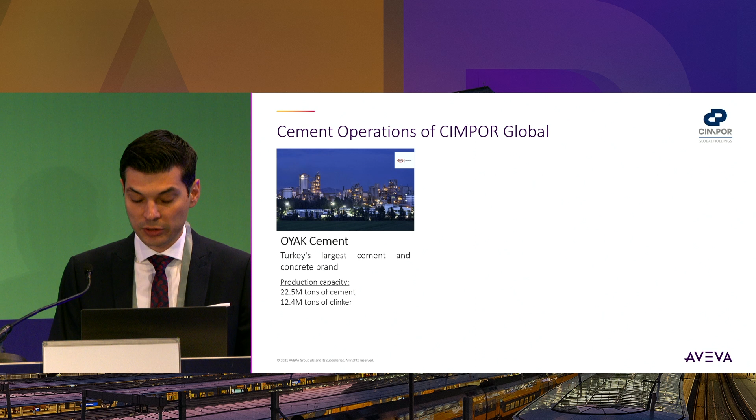OYAK Cement has a market share of 15% in total production and is the largest brand in cement and concrete in Turkey. CIMPOR Portugal and Cape Verde is the market leader with 55% market share in Portugal, and it's a well-known brand in West Europe. And the newest one is in West Africa.

It's CIMPOR Côte d'Ivoire. It's a unique plant. We are saying that it's a game-changing plant in the cement and concrete industry because it's the world's first greenfield calcined clay integrated plant. Calcined clay is a new artificial additive product, replacing clinker. The issue is that it has very low CO2 emission compared to clinker. We will produce low CO2 footprint products with that technology. Our aim is to spread it, especially to Europe and all over the world. That was the first plant.

When I come to our digitalization journey, it started nearly 5 years ago. The main aim was first to collect the data and to visualize it. But the challenge was online visualization of the plants, operational units in 3 continents at the same time. That was the first challenge.

The other thing is we wanted to try to do predictions and improve our efficiency, productivity, and quality on cement. Due to that, in-process predictions was one of the challenges. High reliability and predictive, prescriptive maintenance, and also emissions and the sustainability part, were our aims at the beginning, to collect that data and improve our abilities on those issues.

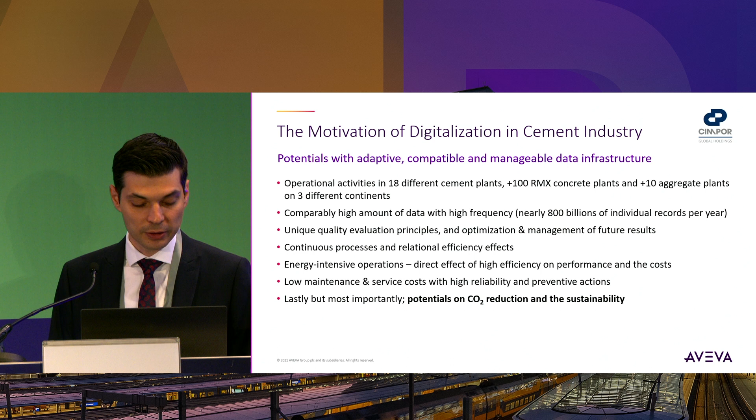Those are broad topics, but today the most important one is the potential for CO2 reduction and sustainability.

What are the challenges? We have a huge amount of well-organized and globally connected monitoring structure. It's not so easy - we did it with PI. We standardized the hierarchical information for all plants and implemented and replicated it, which sped things up so much. After designing the whole plant structure, we put it into the plant and connect all the signals from different sources, different brand names, different types and versions of PLCs, software, or other connecting units.

We could do it easily. Those connections and our data sources vary. Time stamping is critical because we try to make predictions and AI adaptations - time stamping is one of the most important parts. We could do it very well with PI, especially on the quality side.

Sampling was a problem. We solved it with QR codes and NFC-type readers connected to the PI system. Previously, samples were taken manually from the field to the lab, and you didn't know exactly which hour or date. Now we've connected that - people use handheld tools while taking samples, and we time-stamp the quality data. Quality prediction accuracy is mainly based on that issue.

It was critical, along with dynamic editing options. We are not losing our data - that was the biggest problem at the beginning. SCADA systems only store a certain amount of data, overwriting it after 4 to 6 month periods. Now, in some plants, we have more than 3 years of data available for all signals from that plant, and nearly 80-85% is on a second-by-second basis. It's very frequent, but we stored all the data to do that analysis.

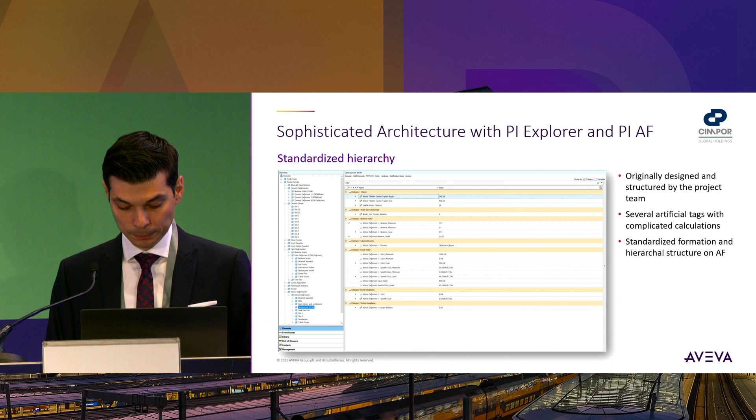That was the advantage for us. Just to show you some main screens from that, it's just our main structure. We developed and drilled down, as I said, from global main key parameters to plant and each unit's detailed parameter.

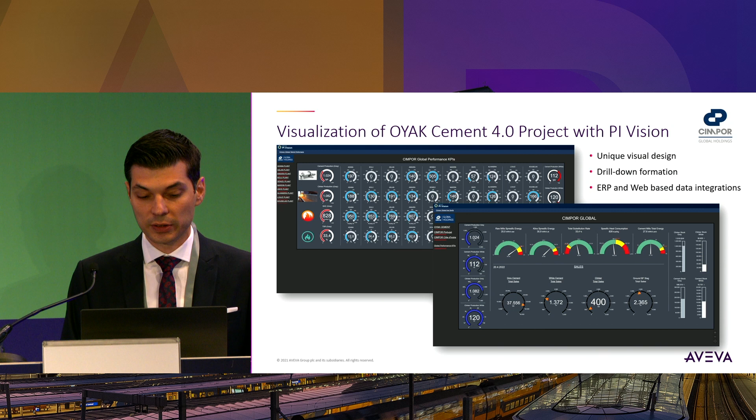We could see actually from anywhere in the world, with mobile phones too, by the help of that mobile capability. Now each plant's people can use it, and at the meantime design their own screens for unit-based or any equipment, whatever the aim - process, quality or maintenance part. Plant people are using those details in their plants.

Now I want to say why CO2 and cement industry matter. As we all know, after industrialization sped up all the issues, not only in the industry but the world's annual CO2 emissions drastically increased. It's the popular issue these days - to prevent it, to decrease it, to mitigate CO2 emissions.

The role of the cement industry is a little bit critical. The product is very cheap, but when we look at CO2 emissions per ton of cement produced, around 650 kgs of CO2 is discharged to atmosphere.

And when we look at how much cement is produced in a year - 4.4 billion tons of production in 2021 - it's a huge amount. When you multiply it, cement becomes - there are hundreds of different industries, but 7% of total discharge emissions is the responsibility of cement.

Anything we do can directly affect CO2 emissions. Due to that reason, it's our responsibility.

On the other side, with the taxing issues, especially in Europe and now coming everywhere, it's a cost for us. These days, cement price is around 80-90 euros per ton, and today's CO2 emission price has reached more than 80 euros.

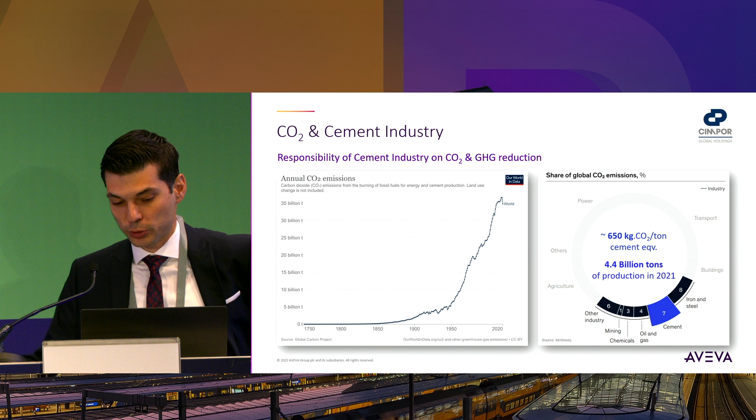What are we doing? What's the role of PI in our decarbonization strategies? The first thing is online monitoring and analyzing capability. Just the details, I will show you some examples - I'm passing that part quickly.

The other one is predicting emissions, guiding process control, higher combustion efficiency and less fossil fuel usage, high efficiency on grinding process and predicted fineness to decrease our electricity consumption, especially on the indirect part. Reducing our CO2 footprint with improved quality.

As I said, we are focusing on low CO2 footprint products like calcined clay, also using alternative fuels rather than fossil fuels, like SRF, biomass fuels from municipal solid waste. We are decreasing our fossil fuel usage, incinerating waste and using that heat rather than fossil fuels, decreasing our CO2 emissions, and improving productivity and efficiency on renewable energy systems.

It also helps us because we are focusing on renewable energy systems like waste heat recovery with turbines, using our waste heat to generate electricity, and we have solar plants. We need to follow them. We are planning to establish new wind turbines, and due to that reason we are also trying on that side.

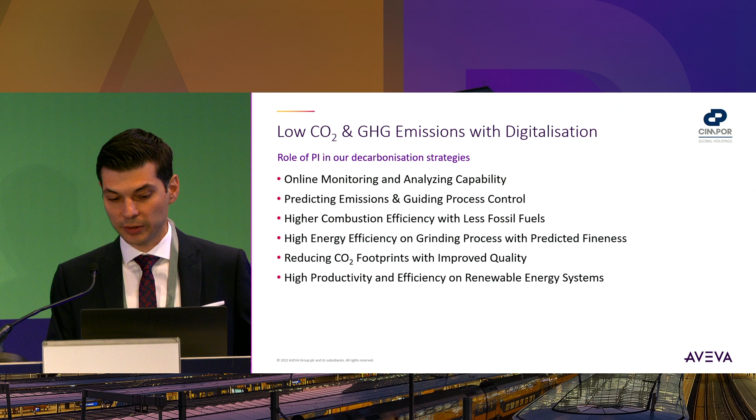On the follow-up issue while tracking emissions, here are some screens covering all Turkey operations and plants, and the main emission parameters you can see here - we could follow it instantly, like NOx, CO2, dust and SO2 and other parameters in PI.

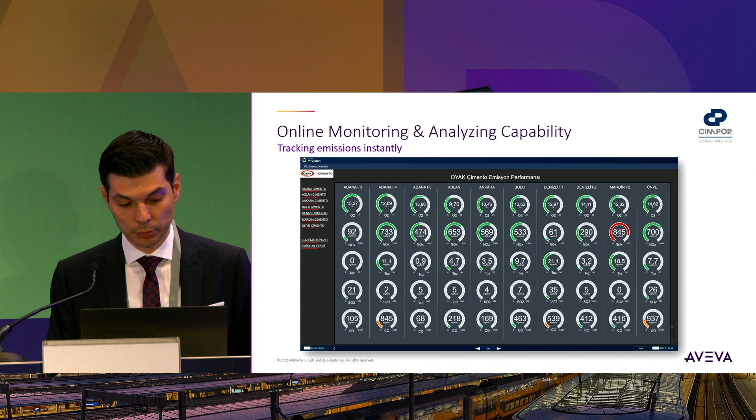All people can see that. On the calculation part, especially CO2, everyone in the industry knows it needs to be approved. Each year we collect our data and send it to an authorized authority.

We give all that data, they approve it, it takes some time. It's detailed calculations - many parameters need to be calculated. It takes a long period, then gets approved, and each year we present the data.

Many companies only have yearly data available. We first decreased that to monthly. Today, we could follow it instantly - how much CO2 per ton of clinker, we could show it by the help of PI.

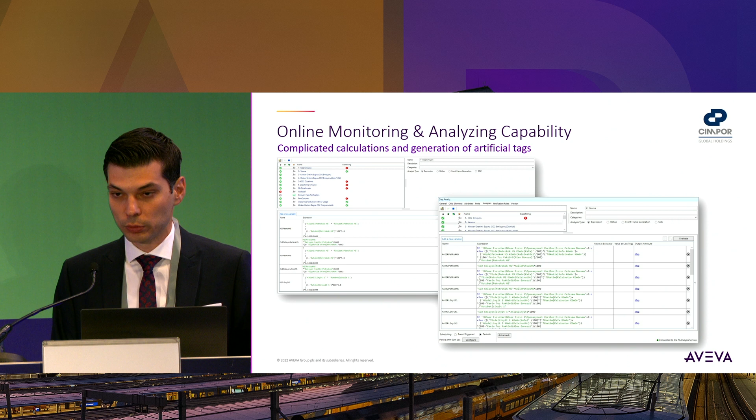Every person can open it and follow it instantly - how much CO2 they are emitting all over the world on a unit basis. By the help of that analysis tool, we added many specific calculations in it, and we could follow those CO2 tracks by detailed calculations, with the help of PI-AF's analysis part.

Predicting emissions is critical to process control. It's like a SCADA screen, but we added additional things into it. The advantage is it includes predictions and upcoming issues. A plant's rotary kiln is one main unit.

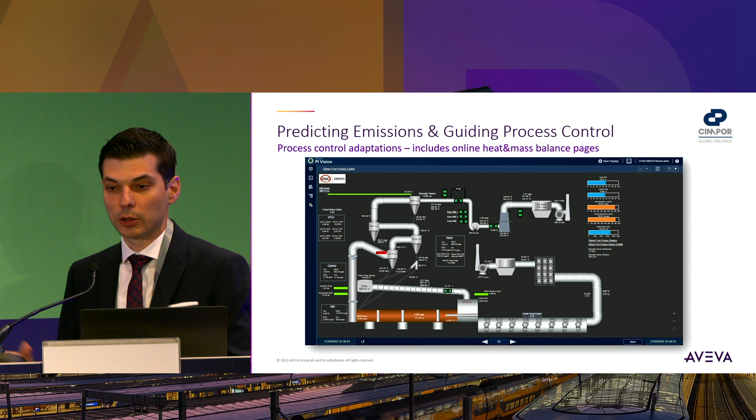We could show it to people, just follow it to check the trends, long-term evaluation, and they can take reports. Each day we send automatic reports for plant managers and department managers, and a summarized report to us by the help of PI DataLink. They could check it with sheets, and we are also feeding our BI tool to make reports on that part.

Not only the numbers, we have also started to use visuals as a parameter, using all that process data and emissions data, adding screenshots from our visual cameras on the process camera. You could see a plant's camera in the kiln hood. It was a usual inspection camera, but we are getting screenshots every 10 seconds.

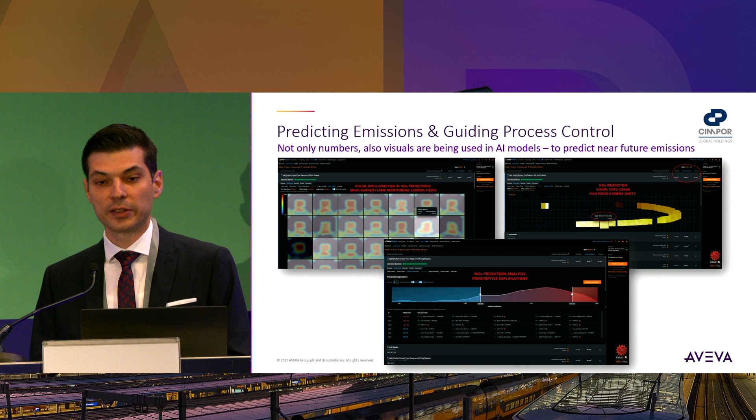We linked it and saw there's a huge correlation between NOx emissions and our quality. We added that data into our analysis, in AI automated analysis, and we generate predictions and send them back to Pi, so we could follow what's happening. As you see, it's a NOx issue.

On the right side, you can see the first one is one of our plants' NOx emissions. It's again a critical greenhouse gas that needs to be controlled. It's important: the blue one is the actual condition, and the orange one is the prediction. As you can see, the continuing orange means future data, because we predict the future, and the plant can follow it for the next 5 minutes, 10 minutes, to see how it's going.

There are two critical issues. It's a hazardous gas, NOx, for the atmosphere, and we need to decrease it by injecting ammonia to reduce that. It's a huge cost, and again it's a hazardous material used to decrease its effect. With the help of these predictions, we could decrease the ammonia content and stabilize the NOx emissions, both cost and environmental impact. Environmental engineers can follow it and focus on that point.

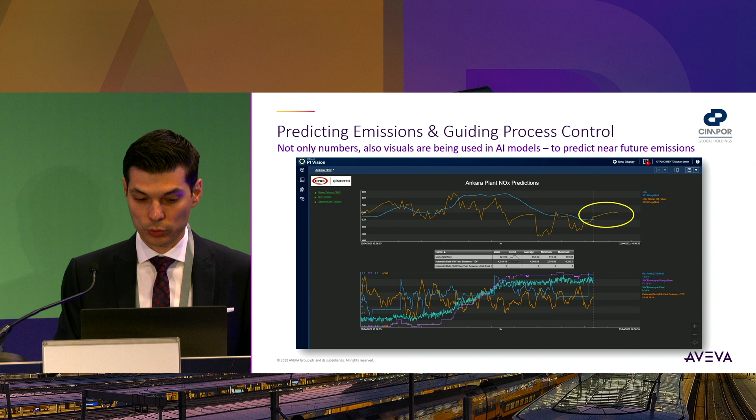Now we are feeding that detail to the APC, Advanced Process Control System. We started 3 months ago in our plant in Ankara, Turkey, with AVEVA APC. Now we are also feeding that blue data. We will use it to control the performance of the kiln, both energy efficiency and quality efficiency. We connect that part to our advanced process control system.

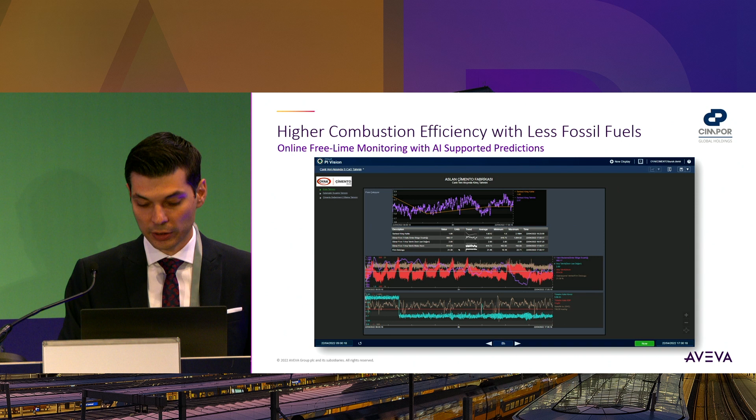Again you could see free lime prediction. The purple one is the predicted value, and the other one, the orange, is the actual trend.

And less fossil fuels - as I said, for one of our plants, thermal substitution rate, replacing fossil fuels with waste, is critical for us. When we started that project, the substitution rate of secondary fuels replacing fossil fuels was 4-5% five years ago. Today we achieved 30% in Turkey operations, and 45% in Portugal. We could replace household wastes, old end-of-life tires, and some biomass sources. It's a challenging issue because it's not like coal.

You need to manage it well to process and keep our quality, you need to burn that material. With the help of that visualization and adapting on it, one of our plants is now in one of the records in Turkey. As you see, we replaced 81.20 at that point in one of our plants near Istanbul, the Aslan plant. That means total burned materials 81%. That plant burns household waste, only 19% they're burning fossil fuel.

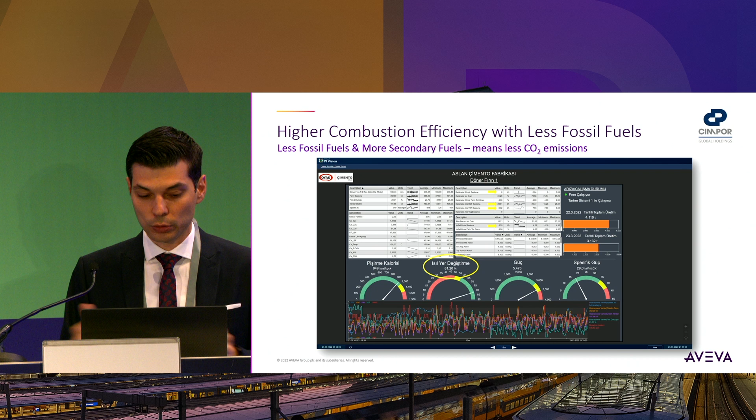The effect is just following correctly because it's not so easy. We are inputting calorific value, some process data, and everything into it, and try to manage it. We now just connect it to the APC system to control the process well, and we drop down our fossil fuel usage by the help of that knowledge.

And automatic notifications: if something happened in the process, with all that process trends, we are sending directly email notification to process engineers and department chiefs to know that the calorific value has increased. You need to check it any time in the day. It's not so usual, but it creates stress on the people just to check it normally, because we realized that at the end of the month, reporting the previous month, we saw that it had just increased. Why did it happen? We checked it.

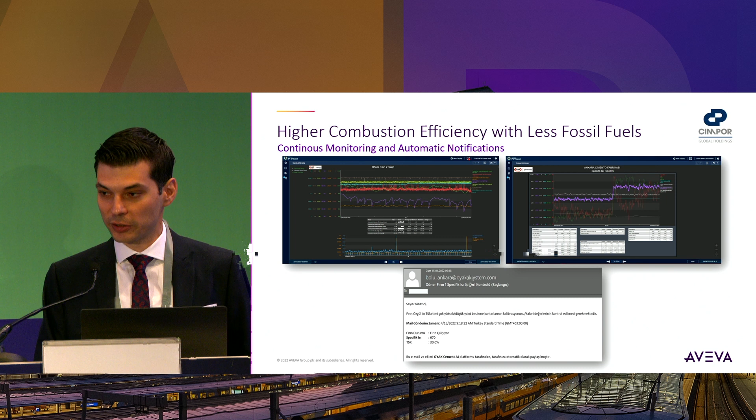Now we could do it interactively because we are sending them notifications. If it comes at night, just in the morning you check it, if increased, then try to answer it, because it's an email sent to everyone. Try to give an answer. We need to push them to just solve it, because it means both not only the cost, but also the CO2 and additional effects. That also helps us in the notification part.

And predicting the other figures in here, as I said, one another thing, the particle size in the grinding part is also critical. While you produce that product, you need to get the quality. We are consuming a huge amount of electricity, nearly 100 kilowatt-hours per ton of cement in an ordinary cement plant. In Turkey we are producing 10 million tons of cement a year. You can multiply it by 100 kilowatt-hours - it's a huge amount of energy. Each consumption decrease could reduce its indirect effect on CO2 and the cost.

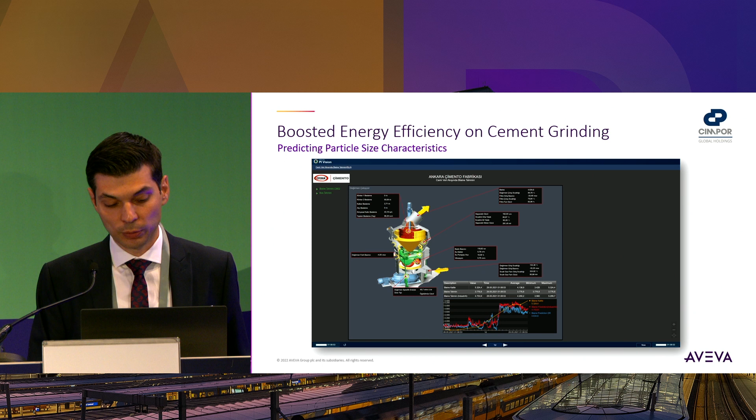Here again, the middle yellow-orange one and the upper one are the predicted ones. It's daily data, you could see 10 to 12 yellow points - these are the actual samples taken in the lab, checked with the device. The others are all predictions. The blue one is a little bit messy looking, because it takes all those predictions, but the rolling 5-minute average is the purple-red one. You could see that it's really matched accurately. It helps us so much to control the process, to stabilize our quality and decrease our energy consumption, because each deviation means a loss in quality and energy.

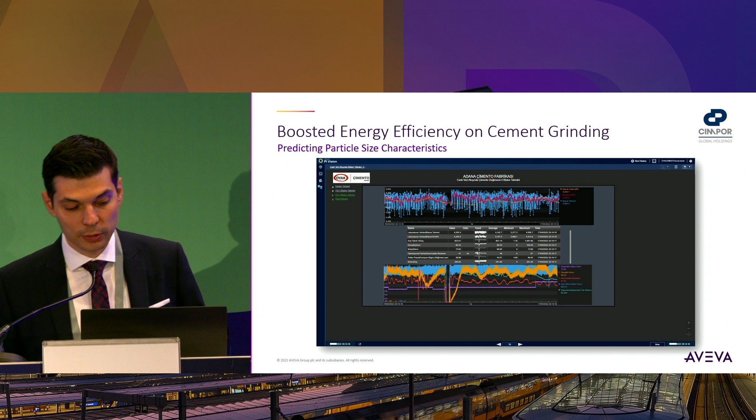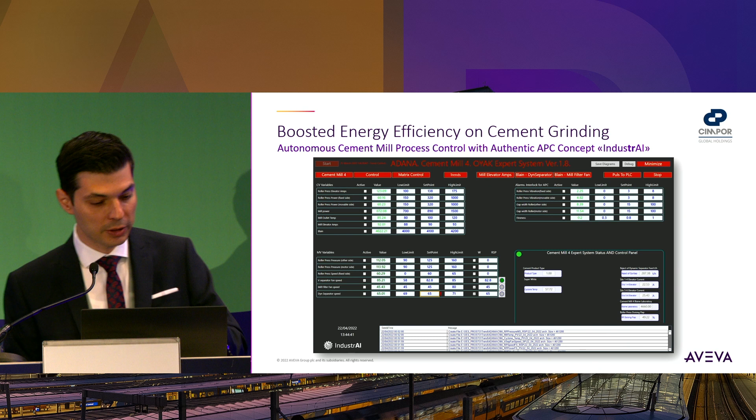In our APC concept, we try to, at the same time, establish a partnership with AVEVA about the APC part. Also we try to check it with our own APC system - it's own-generated since the last 1.5 years. We are just connected to the PI directly, we are getting data, and with the help of that MPC concept - model predictive cascade PID fuzzy - and their combinations, we send the set point to the process to control it. By the help of a huge amount of flow data from the PI we could use that, because it's not possible for a human being to control it. By the help of that, we try to stabilize our process.

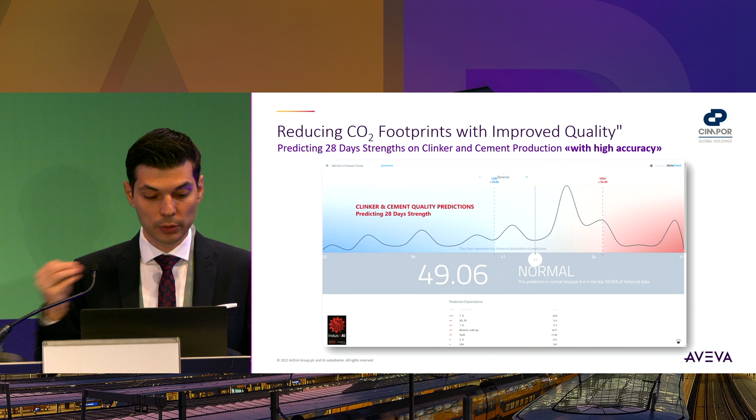And predictions, as I said, we are predicting cement strength at 49.06. It's the 28 days later prediction and its effects. We are putting all that data to the PI and collecting all of them as a hub, sending it to our AI system, getting the predicted value and sending it back. And we are following the plant's clinker strengths, as you could see here - the purple one is the actual lab value.

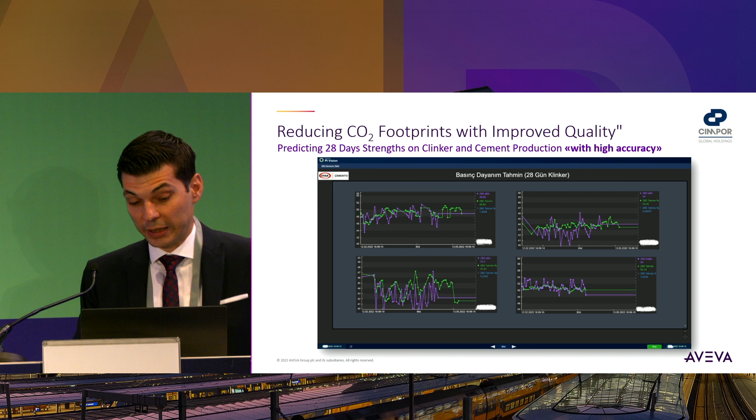They put it in the lab and wait 28 days, then crush it physically - that's the results of purple. The green one is the completely analytical AI-adapted prediction. As you can see, some of it is upcoming data - the purple goes a straight line, meaning it hasn't appeared yet, while the green ones show upcoming strengths. Now quality people can see the prediction I produced today for 28 days out, and that green line shows if it's increasing or decreasing. According to that, they can manage the process toward finer grinding, coarser grinding, adding blends, or recipe modifications to do better. Otherwise, we'd have to wait that amount of time.

This is a view of our renewables - as an example, we have photovoltaic solar plants in Turkey, and now we're doing investments, two 1-megawatt powered plants in our cement plants. This year we decided to invest 50 megawatts additional in Turkey and also 20 megawatts in Portugal. And we are just collecting all the data.

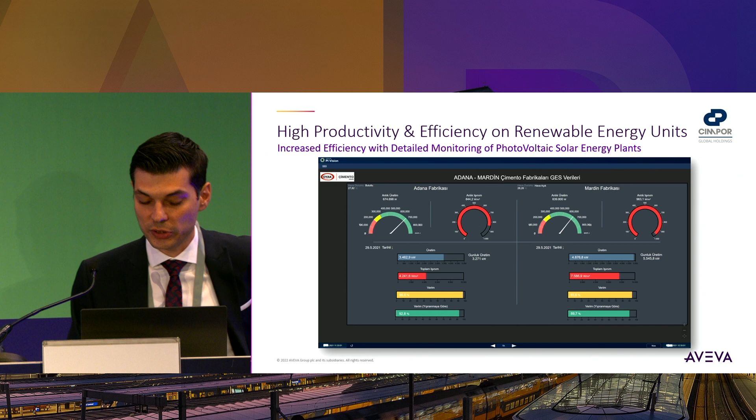It's a pilot start - we just planted a solar panel, a measurement panel like that. It controls the solar energy, how much it is, and each panel is controlled also. If there's any efficiency loss, it can be from dirtiness or some problem in the panel. We can detect this with the help of PI, and people can check it, correct it, and we try to increase our efficiency and productivity on renewable sources.

To wrap up with PI, there are many stories - I'll try to quickly explain and show our screens on that part: visualization on spontaneous analyzing capability, online CO2 emissions calculations and visualization, predicting NOx emissions which is also critical, process predictions, quality and its CO2 footprint, and higher efficiency. The aim is that not only direct consumption but indirectly, the energy CO2 effect is critical for us - and WHRs and solar panels.

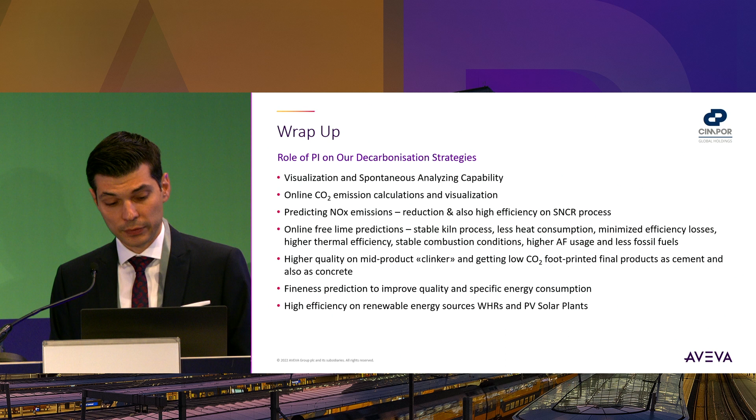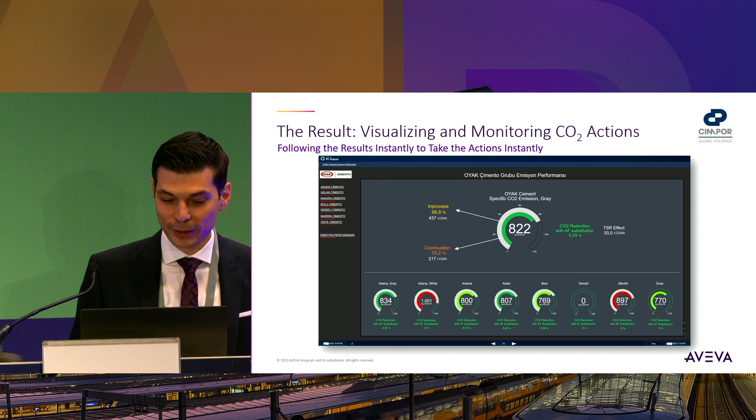Before, it was very detailed, huge reports - they didn't know anything. Now, not only white collar but blue collar people too, in the SCADA screens, can see how much CO2 we are emitting, and they started talking about it. We summarized that data, and added an additional screen - we actually showed how much alternative fuel, secondary fuel substitution rate, on group basis and also plant basis - we can show it in the group screen, and how much CO2 reduced this year, since the beginning of the year.

When that screenshot was taken, I think in March or April, at that date it was 50,000 tons of CO2 decreased by the help of alternative fuel replacing and energy efficiency. It's a simple screen, can you see it? But there are pages of numbers and calculations in the AF to get that number. Its equivalency, when we look at it, is nearly 2.3 million - it's also just increasing - 2.3 million trees' absorption effect. That means 50,000 tons of CO2 can be emitted with a number of trees in a year, 2.3 million, and that decrease is the effect of one year's work of that amount of trees.

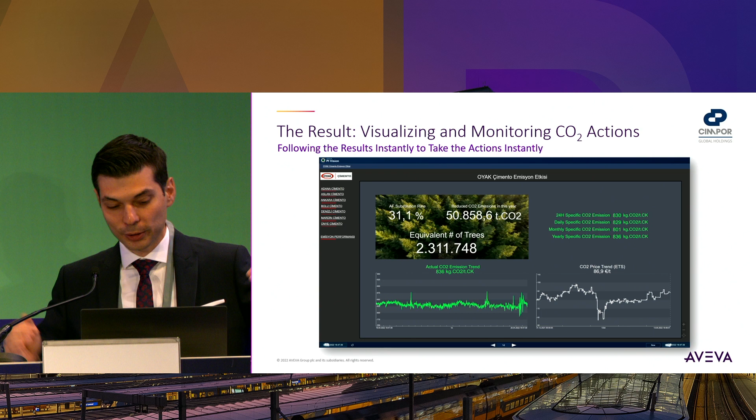In the left bottom side, we are showing the trend, how it's going. On the right side, we are getting, with the help of the API part, the cost of CO2. As I said, at that date it's 86.9 euros per ton - that's the cost. One side is sustainability, the tree numbers, but the other part is the cost, because we are dealing with this issue in Portugal, we are in the European Union, you need to follow the cost too. We are also showing that yes, we are emitting that CO2 and decreasing it for sustainability, but it has a cost - to show our people that effect.

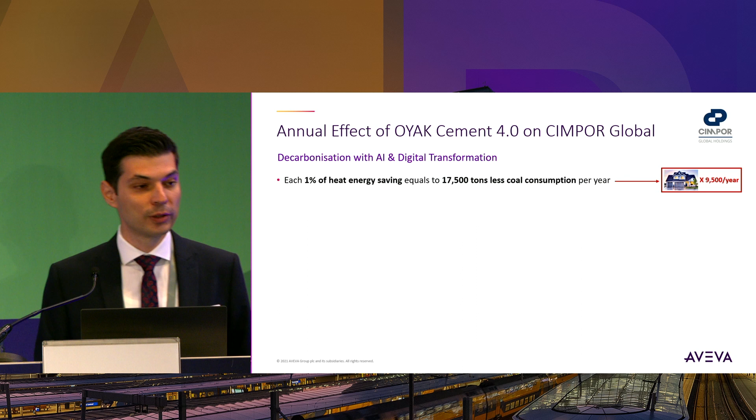Just to say, in the end, the annual effect is a base case scenario to explain for us. For each 1% of heat energy saving, honestly we expect at least 2 or 3%, but it's calculated per 1%. I'll give a figure for yearly production: we could decrease 17,500 tons of coal use. That's the yearly heating energy consumption of nearly 10,000 houses.

If we could decrease 1% electric energy, it looks like we could achieve 4%, though at the beginning it looks like 2%. We have that potential, but taking just 1%, it's around 12,600 megawatts less energy consumption - again nearly 4,000 houses' electricity consumption in Europe, for a medium-sized house.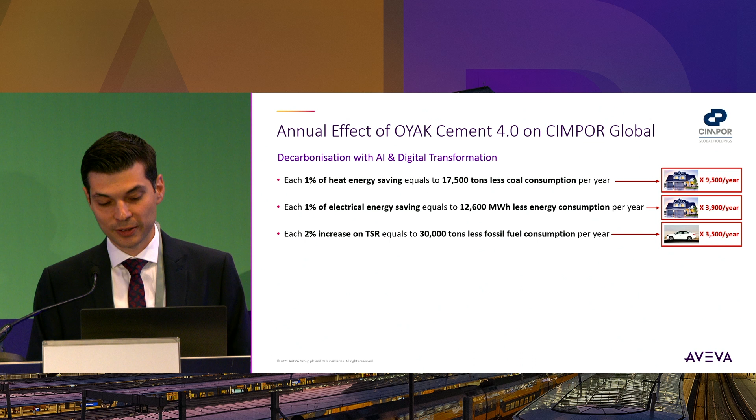If you could increase TSR by 2% - as I said, we reached from 5% to 30% today - just 2% means 30,000 tons less fossil fuel usage for us, equal to 3,500 passenger cars' CO2 emissions per year.

With 1% of high quality clinker, if we could use less clinker and add other natural additives, we could save 110,000 tons of clinker per year. And a 3% reduction in maintenance costs through prediction and anomaly detection is roughly 1.5 million euro savings per year for us.

The total effect reaches around 9 million euros with these figures, and as I said, it can be multiplied - this is just a figure for us. We're close to that but haven't achieved these figures yet since pilot applications are still in progress. It's just an idea to show the total potential. If applied, we're planning to do it in the upcoming 2 to 3 years, and our aim is to double or triple it.

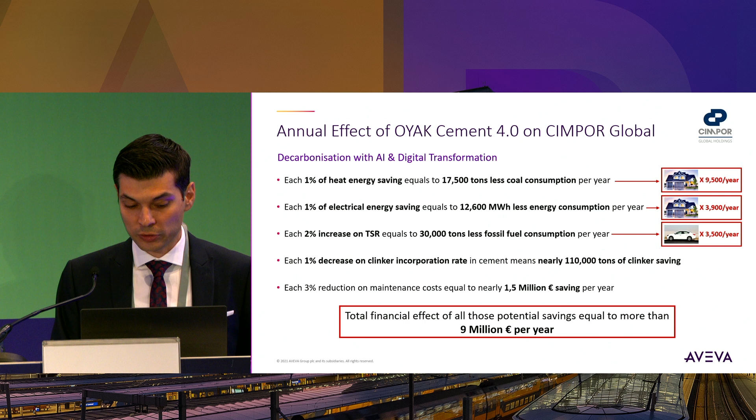At the end, all these advantages mean more than just financial things. Those figures of only 1-2% mean 140,000 tons of CO2 reduction in a year - that's what I showed you earlier, just in the first quarter, it was 50,000. It's much better than that because it's not just 1-2%, that was the actual figure.

Due to these assumptions, it's at least 140,000 tons of CO2, which equals 6.5 million trees. To give an idea of the forest area needed, that's 4,500 football fields - we're talking about a forest like that and its absorption capacity, that's what it equals. It's also motivation for us on the sustainable side - yes, we are emitting it, but we could decrease it and achieve that performance.

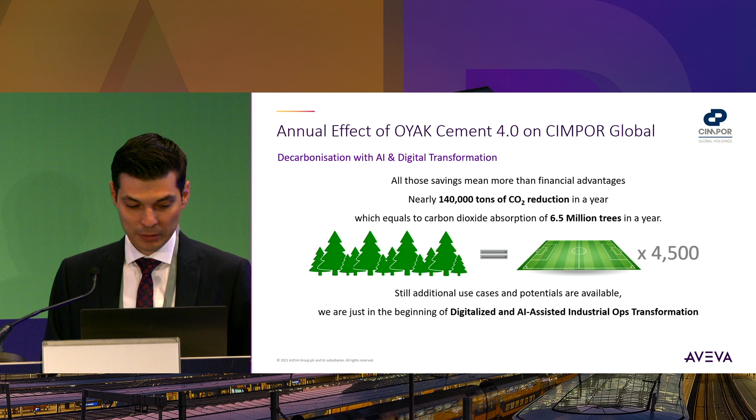We know many things could still be applicable because when we started collecting that data, we realized the topics are huge. People always say data is the fuel - if you have the fuel, you can do anything in digitalization. It's the same in cement. I believe if you can do this in cement and concrete, which is a very robust, conventional and low-tech part where people's minds aren't so easy to manage, then in any industry, if you have good data, you can do many things. That's our final note.

Thank you for listening. If you have any questions, I'm glad to answer them.